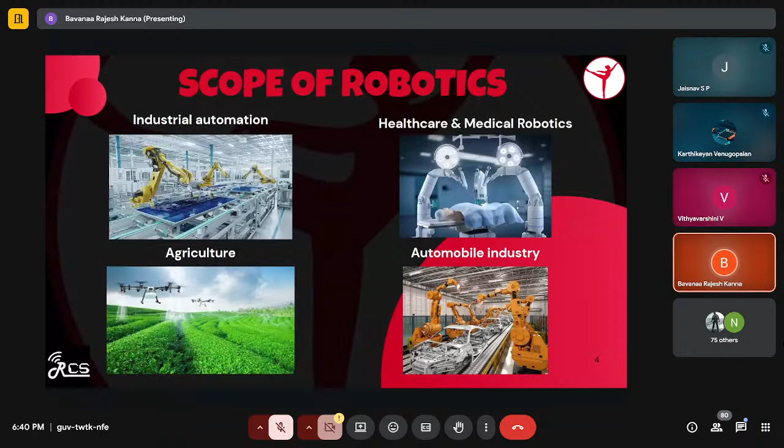Next comes the healthcare and medical robot. I guess you have heard of many of these robots which actually perform surgeries instead of doctors. And next comes agriculture.

In agriculture, we are using drones for transporting and also for spraying pesticides, fertilizers, etc. Next is automobile industry. As we know, in automobile industries, the parts are huge and it is difficult for humans to carry, so robots have come into action which make manufacturing easier and faster.

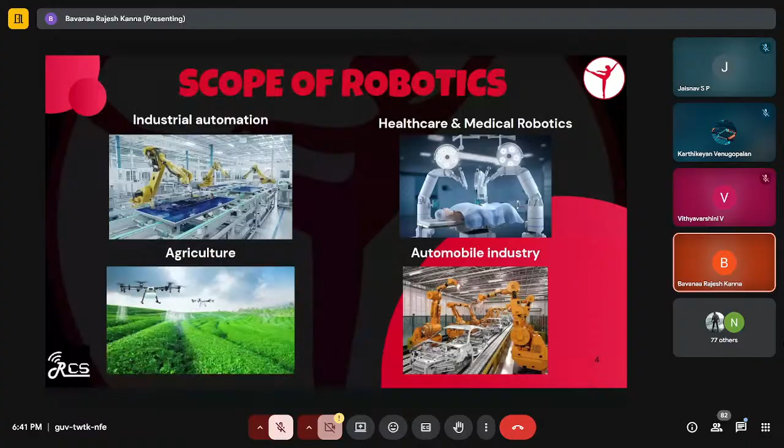Let's move on to the next topic: types of robots. I just have a doubt - have you ever seen these types of robots in your daily life or come across these things? I guess you have come across it.

So first one we'll go into articulated robot. Articulated robot has many joints which are mainly for accessing different 3D spaces. It actually deals with all the X, Y, and Z axis.

Next comes the SCARA robot. SCARA robot is designed especially for speed and rigidity. It mainly focuses on horizontal planes like X and Y axis.

The third one, the main important one, is Cartesian robot. It is actually a linear movement based system. It deals with all three axes, X, Y, and Z, which creates a rectangular workspace.

The fourth one is Delta robot. Delta robot has high speed and precision. It mainly deals with tasks like packaging, assembling, and sorting.

The fifth one is cylindrical robots. It has two linear joints, one joined with the base and other with the end point. It actually covers the surface area of a cylinder.

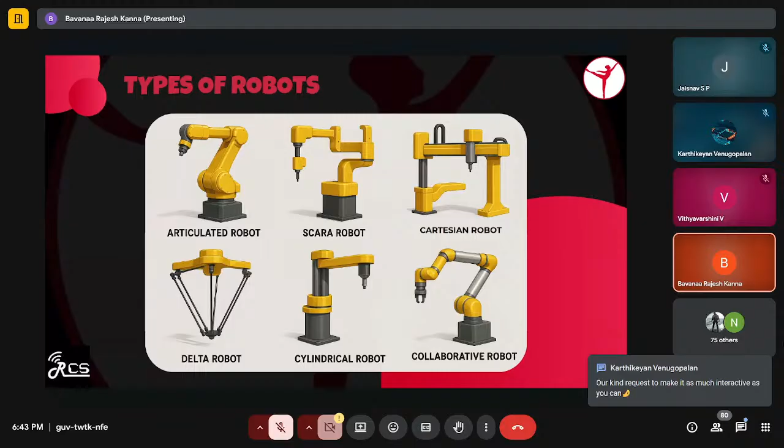Next is history of robotics. History of robotics, like each and every field, has its own history. In the same way, robotics has a history from during the Renaissance up to the current age.

In the early period, during the ancient times, the Greek astronomical calculator was actually considered as a history of robotics. Next, during the Renaissance and Enlightenment, Leonardo da Vinci designed many automations and mechanical devices which helped us achieve robot-like structures at the present stage.

Next, during the Industrial Revolution, huge machineries became great ones which made industrial automation as well as robotics have a boom here.

In the past decade, there have been extraordinary changes, including AI along with robotics. Now, at present, we have robots with AI generated, which made the work easier for us. This is the evolution of robots from the Renaissance to the current age.

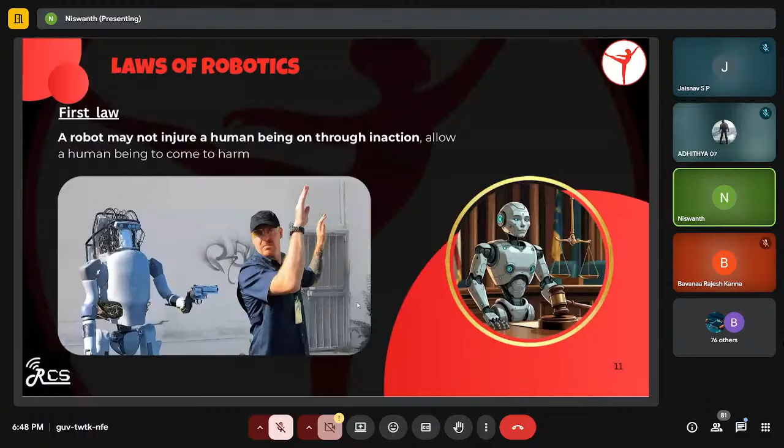We all know that. Let's go to the second law. Robots should not disobey given orders unless it contradicts the first law. For example, let there be a person A who is very depressed, has suicidal thoughts, and he orders his robot to kill him. The robot should not do that because human life is obviously more valuable.

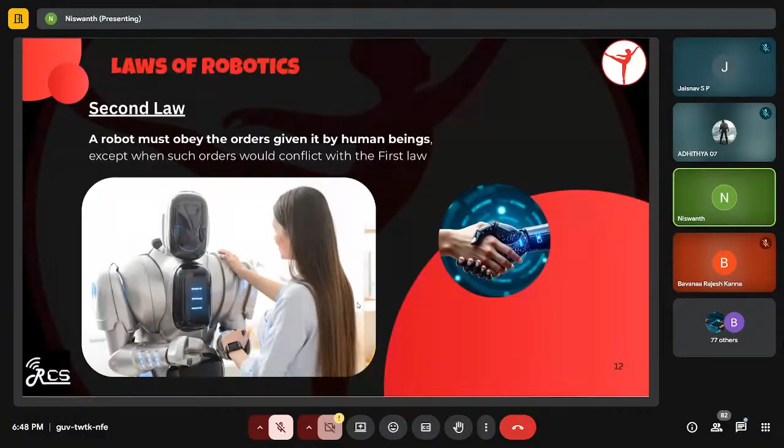In these circumstances, the robot should not obey his order. It should violate his order, it should override his order because it contradicts the first law, right? It hurts the human being. I hope you guys understand.

Let's go to the third law. The robot should always protect itself and avoid performing tasks that hurt itself, unless it violates the above two laws. Because if the robot doesn't exist in the first place, if it hurt itself or underwent self-destruction, who will protect the human being? Who will protect his master? Nobody will be there, right? So under all circumstances, it should protect itself unless it contradicts with the first two laws.

Now, before seeing the zeroth law, which was introduced and added to the original three after a while, let's see about a scenario through which we can understand or perceive these laws very well.

This is the scenario given by Isaac Asimov in his story Runaround. There are two people, A and B, who are miners. During mining there was an accident and A got seriously hurt. He is on life support, and the life support is out of power. It needs a mineral to power it, and they know the mineral is available a short distance away in a nearby pond. They detected it, so person B orders a robot named Speedy to fetch the mineral from the pond.

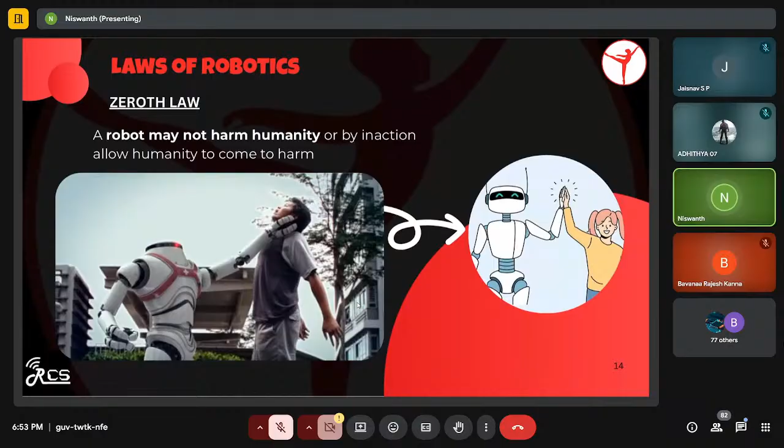During his time, it was only fiction. Later, after further development in our field, scientists actually accepted these four laws. Nowadays, there are lots of developments and lots of new sets of laws drafted for the field of robotics by several institutions and organizations.

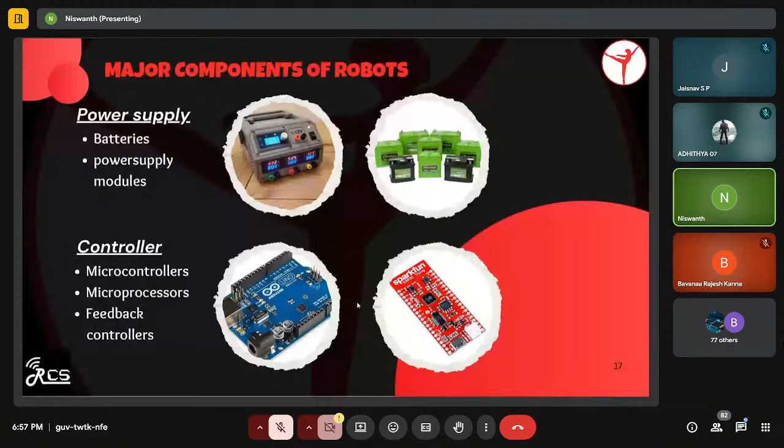Sensors act as the sensory organs of a robot. They are equipped with many types of sensors, and there are a variety of them. Let's see one by one. There are proximity sensors, which detect objects without actual contact, for example IR, ultrasonic, and PIR sensors.

Then there's the vision sensor, used to get the image of the surroundings around the robot, for example a camera. Then let's go for the gyroscopic sensor. Gyroscopic sensors are used to maintain the balance of the robot. If it moves on a rough terrain or something, it needs some balance, otherwise it will fall and lead to property damage and stuff, so it needs balance.

For example, there is the force balance accelerometer. That's a sensor which maintains balance by providing counteraction using a feedback loop when acceleration is detected. For example, if there is a sudden acceleration due to a fall or rise, it will detect that and take counteractions in order to maintain stability.

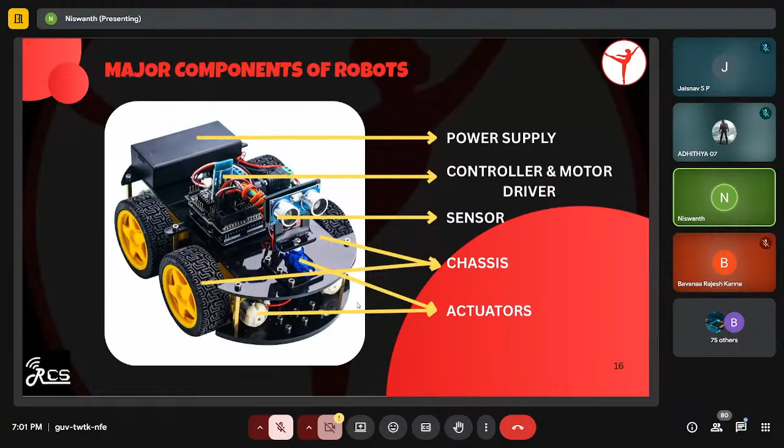Here in our robot, we used hobby gear motors and a servo motor. They are denoted as actuators, as you can see. Examples are the servo motor, as we said, and the stepper motor. Linear actuators are also there.

Next, we bought all of our components now for our science fair. Now we are gonna crack the science fair or whatever. Now we have to assemble them. On what will we assemble them? We need a base in order to assemble them. We need to put all of this into one single robot.

For that, we need a base, and that's basically chassis. Chassis is basically a base. It houses all the components, provides structure, mechanical strength, and stability for the robot. It also provides shelter or protection to the components from elements of the environment, like dust, dirt, or water. There are various types of chassis - wheel, tracks, and legs, among many others. We can 3D print them according to our needs, or we can buy them readily from the shops also.

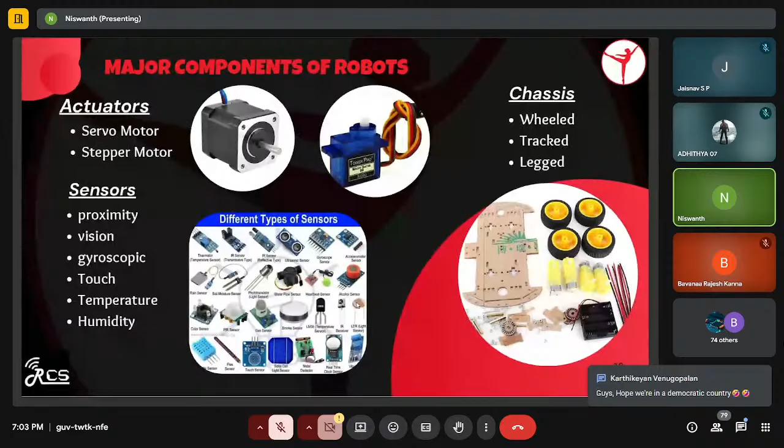Okay, moving on. Types of robotics: autonomous, manual. Autonomous robots are self-controlled robots. They are capable of taking decisions and acting on their own, using stuff like feedback loops and AI.

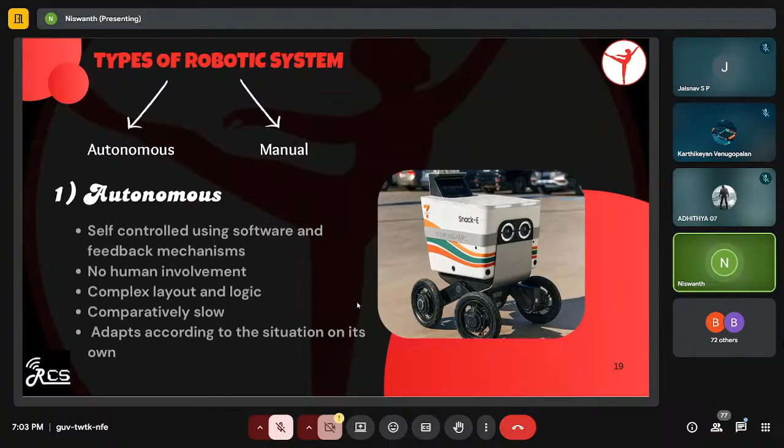They are like modern robots, and they do not require any sort of human interaction in order to process the inputs and stuff. Due to these many components, in order to do these tasks, they need to house many components, and they will have a big backend work. So they are usually complex and comparatively slow, and they can adapt themselves based on the surroundings and input data and their past mistakes, and they can correct those things.

But with manual robots, a human is required in order to process the input and give the output, but they are fast. Why? Because the robot is doing very little work - the human itself is processing the data, so it is obviously faster than autonomous robots. But it cannot adapt to the surroundings; we have to update it on our own once in a while, and it's comparatively simpler than autonomous robotic systems.

And we have mobile robots. The name itself gives it away. As the name suggests, they are robots which can undergo locomotion - they can move from one point to another in a given space. There are many types.

Based on the chassis or base used, as I told earlier, we can classify them into wheeled, tracked, or legged. Wheeled chassis or wheeled robots are very effective on leveled terrain and are energy efficient. But on undulated or uneven terrain, we can use legged or tracked chassis. Tracked are more durable than the other two, by the way. And with legged chassis, based on the number of legs, it can be biped, quadruped, or hexapod, depending on your requirements.

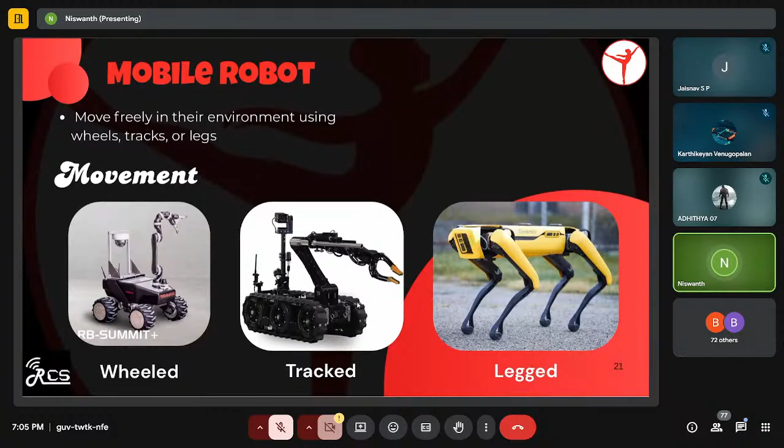Let's see about their applications. We can use them for warehouse logistics, navigation, or travel, and they are also used in space exploration missions, like rovers and landers.

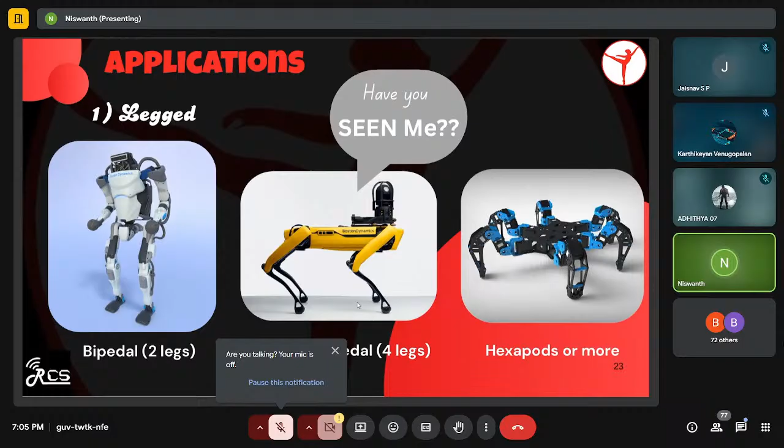The next type, humanoid robotics, which inspires us the most and takes a lot of our interest, right? They are robots which look and act like humans. They have a torso, head, hands, legs, and make decisions like a human. They are tools in order to achieve those things.

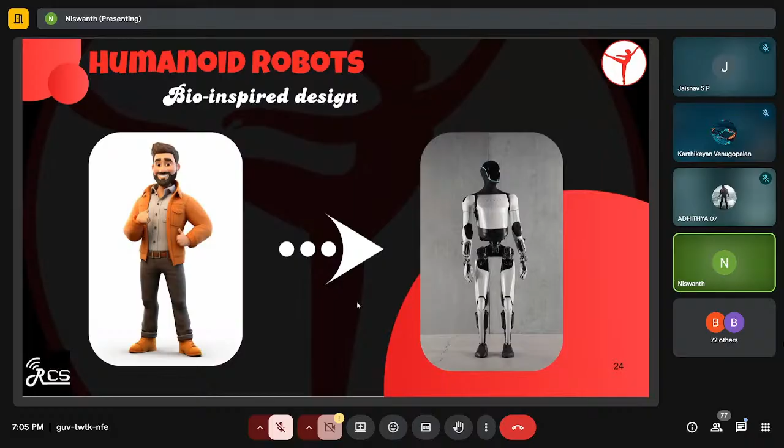For example, there is Asimo from Honda and Sophia from Hanson Robotics, which you know very well. It was in Tamil textbooks also, and many other textbooks. It's a pretty famous robot, and it once said something about killing all human beings. And Atlas from Boston Dynamics.

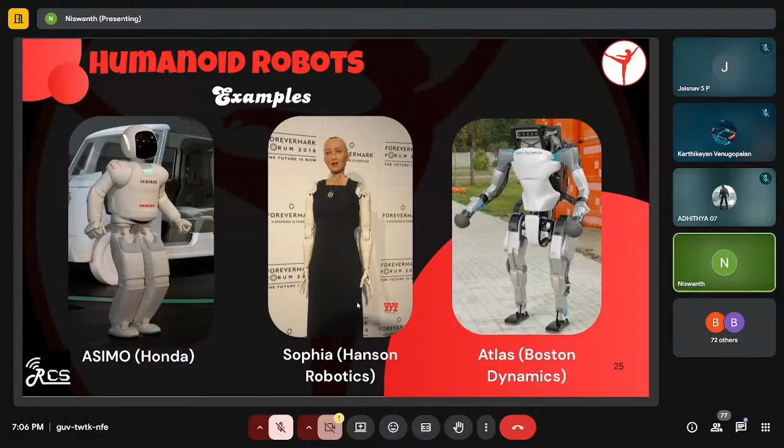Next, drones. So far, we have been traveling in the terrain itself. Let's just fly now. Drones are unmanned aerial vehicles which don't need a human to drive them, which can be controlled using a controller, or it can navigate on its own. Both are possible based on the model.

Based on this, drones can be classified into three types. First, multi-rotor. These drones consist of more than two rotors, usually four rotors, and it can be 4, 6, or 8. Based on the number of rotors, we have to configure them to provide much stability.

Next, fixed wing. They have wings like an airplane, but they require a runway and some structure in order to take off and fly. But it can cover long distance compared to the multi-rotor.

And now we have the hybrid type. They do not require any runway, as they can vertically start their flight and fly, and it can also cover more space compared to those two. It's like a hybrid of those two, as its name suggests.

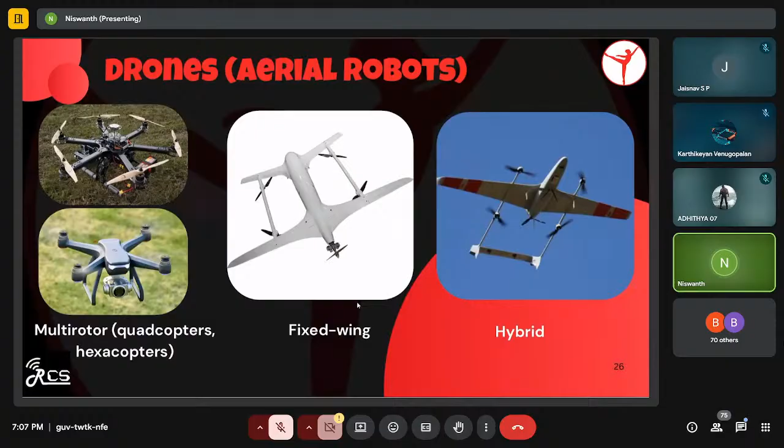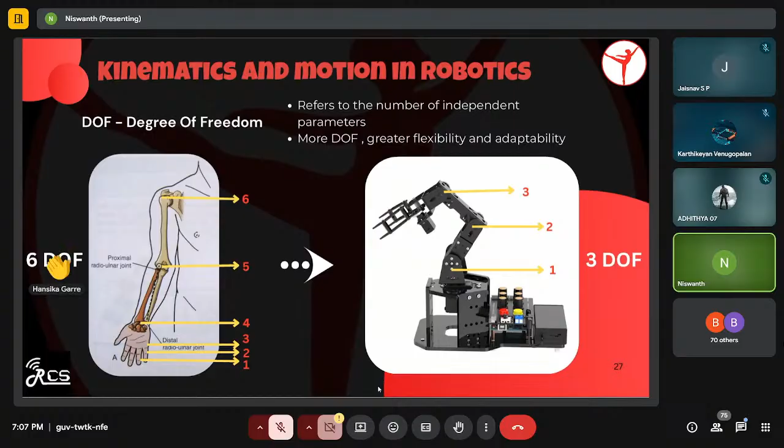I hope you guys have gone through these topics and understood them well. Just before moving on to the next topic, I'll ask you a few questions. It's not too difficult. Up to now, we have seen many robot types, applications, and histories. So I guess anyone can share about their experience, or which robot they have seen or heard about before coming to this workshop. I guess each and everyone can share about it.

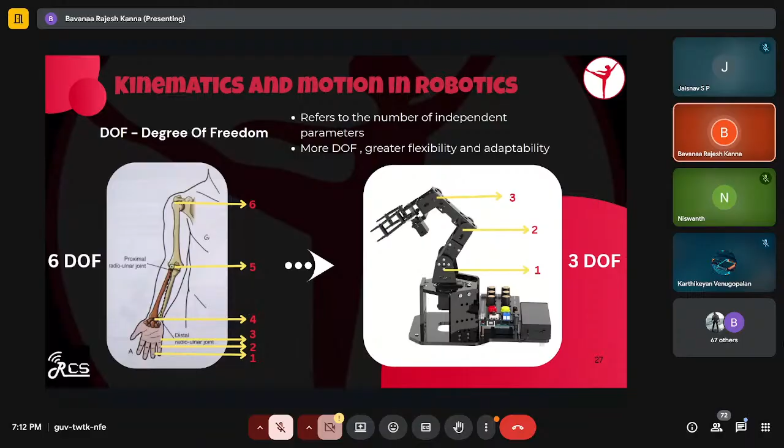Guys, regarding this kinematics, let's again go to the manipulator arm itself. Our arm has around three joints, right? It has 1, 2, and 3 joints. So it can move in three angles, can be moved at once.

Let us assume that we want to move the end effector, that is the grabbing thing, from initial position to final position, say A and B. A is given; it's at origin. Let us say we are given a set of angles and length into which we have to move the arm, and we are asked to find the final position, the final coordinates. For simplicity, assume this happens on just a 2D plane, not 3D. XY coordinates will be given, and the final x2 and y2 should be found based on the given angles and length.

This is what forward kinematics is, pretty straightforward. For inverse kinematics, this is basically the opposite of the forward one. We will be provided with the initial and final position, and we have to find the angles to which the robotic arm should be moved at each pivot point or joint in order to achieve the locomotion and reach point B. Based on the principle, the inverse is found. Inverse kinematics is pretty hard because there are many ways to achieve a single locomotion and reach point B. There are more than one way to do that. So that's forward and inverse kinematics. Any doubts?

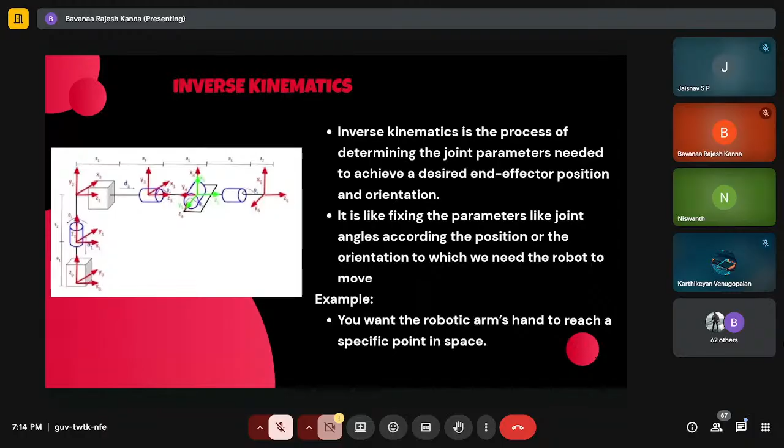Let's move on to the next topic. It is actually based on ethics and safety in robotics.

To be frank, if we look into any of the objects or things which we buy in our daily activities, we first look into whether it is safe or harmful, whether we can use it or not, how to use it, what is the user manual, etc. In the same way, for robotics, we have to look into the ethics and safety.

The first and foremost thing to be followed is based on the laws previously given by Isaac Asimov. It actually encompasses the ethical consideration and safety measures involved in design, development, etc. It is not only about how we deal with it, but also about who manufactured it and how. There must not be any damage, either for the users or for the producers.

The first key points included in this are safety protocols like ethical impact assessment, which plays a great role when we speak about ethics. Next, addressing issues like bias, privacy, and accountability. In the present world, addressing bias, privacy, and accountability has been a great demand. Many are unaware about where to address these things. While purchasing or manufacturing a robot, these things must be specified and noted with caution.